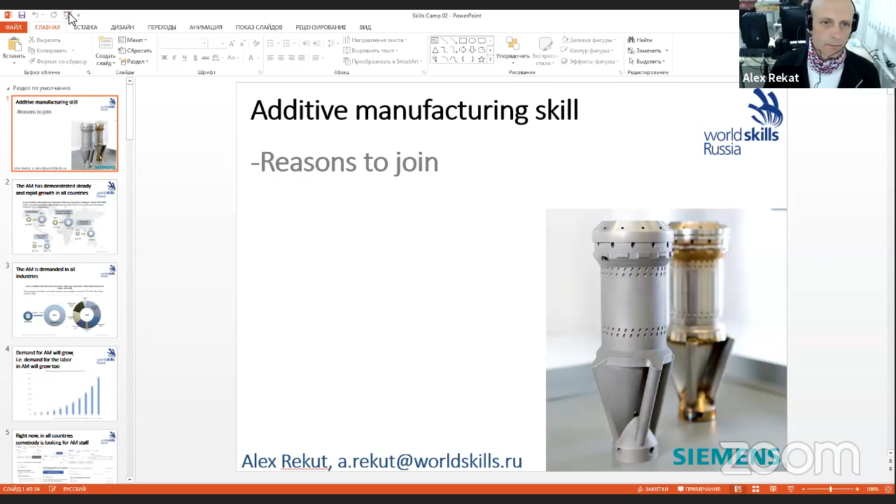First of all, let me introduce myself. My name is Alex Rekut.

In 2010, I proposed to create a new educational state standard for vocational education in additive manufacturing in Russia, and I proposed to create a new skill in [20]14. So from 2014 we have been developing this skill in Russia, and we have some experience.

I understand quite well that all of us are from different countries, and we have different situations in our countries, different conditions. That is why we have different views of additive manufacturing as a skill. But today I'll try to share part of our experience in developing this skill that could be, or maybe even definitely will be, useful for you in your countries and in your educational institutions.

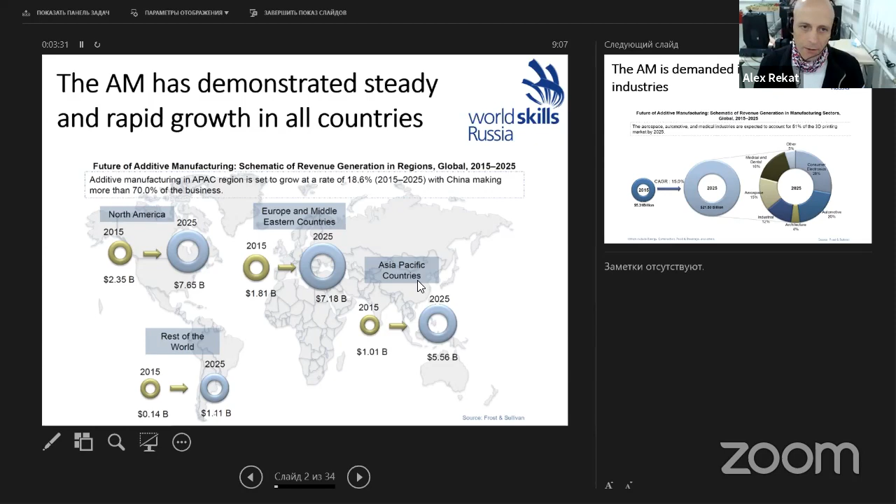But I believe that in your countries you have your own resources for staff seeking, and I think you will find that in your countries also there is some demand for additive manufacturing personnel.

Additive manufacturing is part of Industry 4.0 and one of the global employment trends, and that is very important for us, this word trend. I'll try to explain a little bit later why.

Also, additive manufacturing skill compliance with standards - I mean labor standards - and additive manufacturing is a global educational trend.

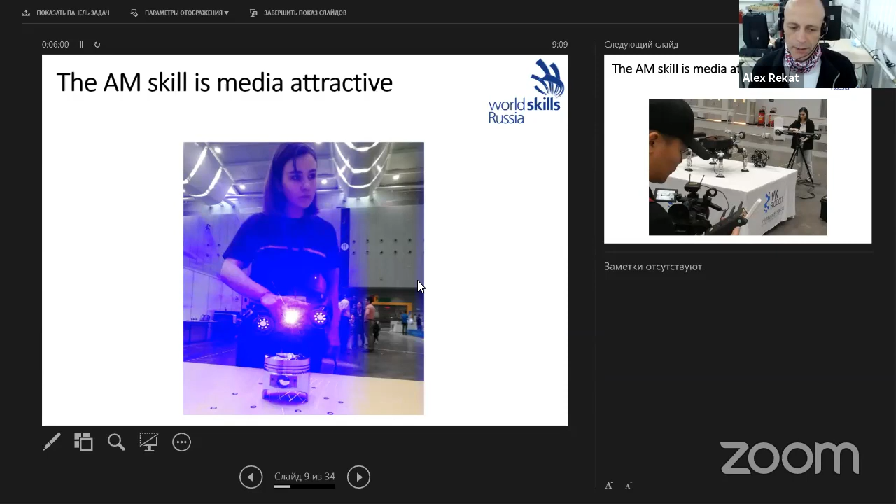From the very beginning, in 2014, we decided to develop our skill not only as a skill, but as an exhibition project too. That is why we attract media at all our championships.

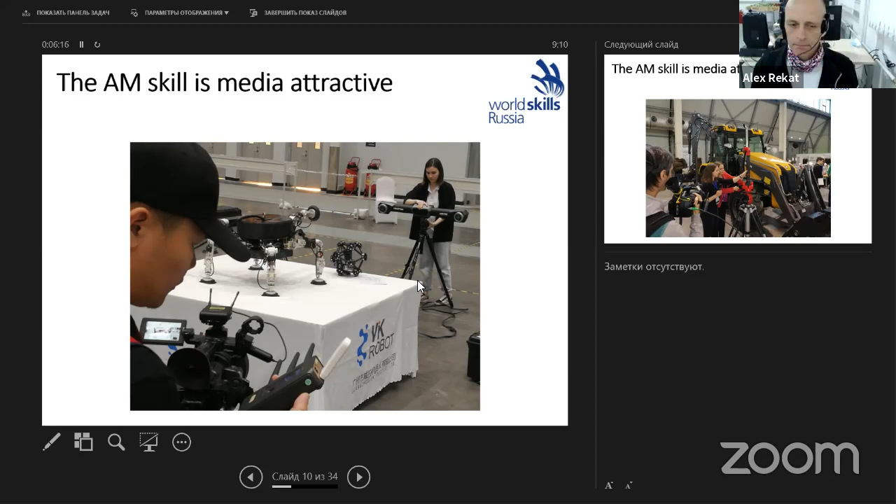We are all, or most of us, from educational institutions. Our goal in educational institutions is to give education, vocational or higher education, doesn't matter. In all skills, our goal is transfer of best educational practice and also education for young people. But we couldn't work without decision makers' support.

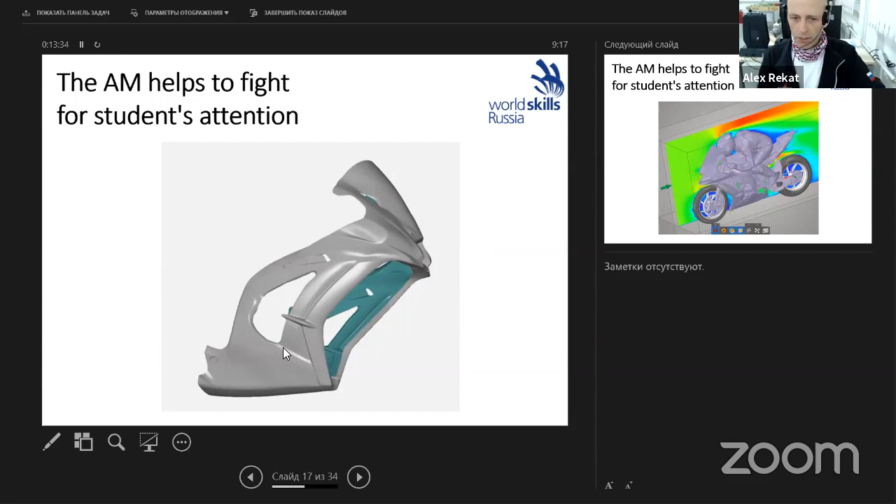So here are some pictures from the beginning. We have a real motorbike, and we made a 3D scan of it. Then we clean some parts or select some parts from the 3D scan, create a model, and test this model with CAE.

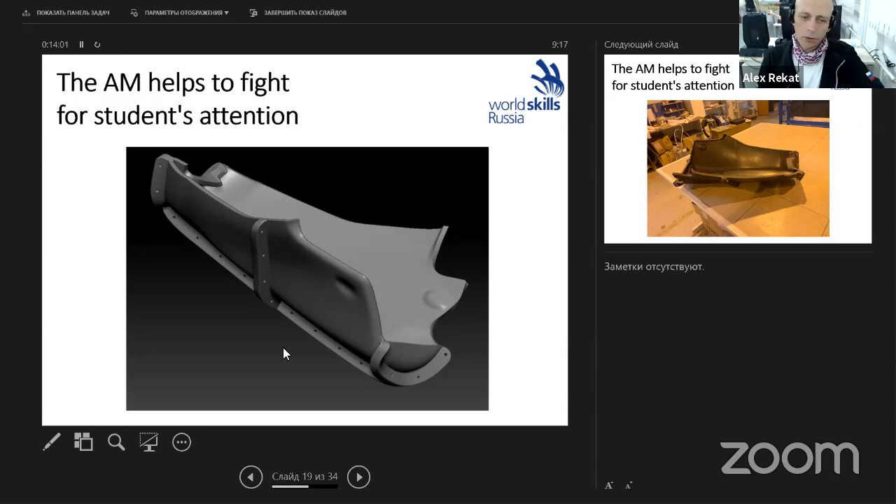Then we create a molding form, or sort of it. Here we have definitely a 3D model of this form, this matrix. Then we printed it with an FDM printer and created the real part.

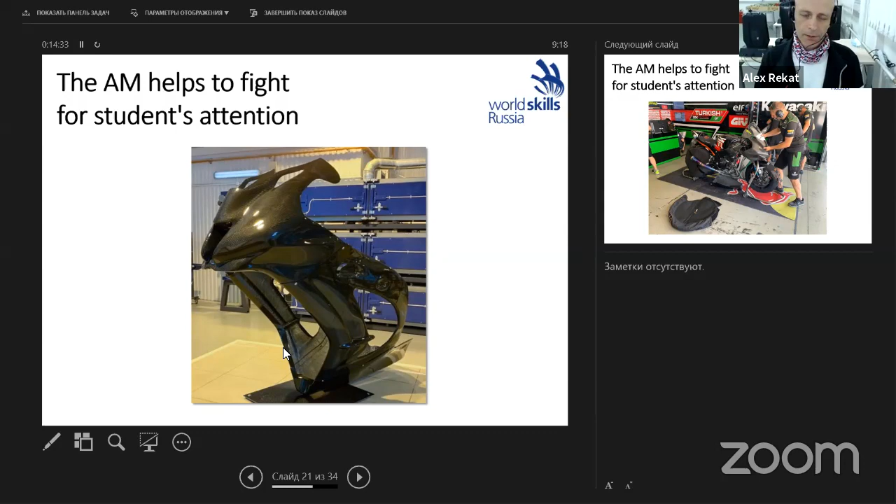It is very important for young people to do something cool that they think is cool. And motor racing is definitely cool in this system of valuable things, as I think. Well, after installation of this part, the result was Kawasaki won.

And third reason. Well, it's always quite difficult, you see, to choose one of two or three talented guys whom you trained during the year, from one side, and every one of us wants to win, wants victory for his contestant.

Additive manufacturing and CAD are a little bit similar, or even similar time to time. And for development of additive manufacturing, if you already develop CAD skill, you need only a few things. First of all, software, and definitely a reason to develop additive manufacturing.

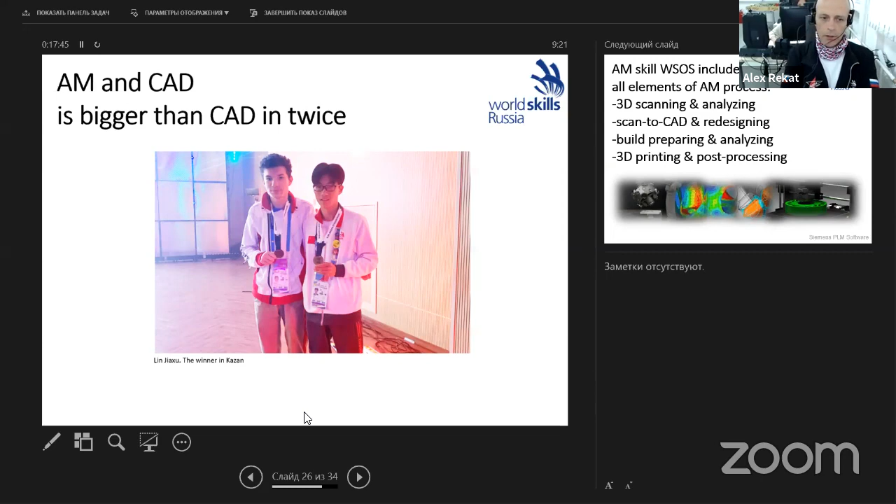That's what I say. So we have three main reasons. The first one, I think, from my point of view, is most important: it gives us new opportunity to develop our educational institutions, because it helps us influence decision makers and attract funding.

The second one is involving students in your projects. And the third one, maybe not very important, maybe not: it's a way to increase chances for winning, because usually we have everything for this skill in those institutions that provide CAD design.

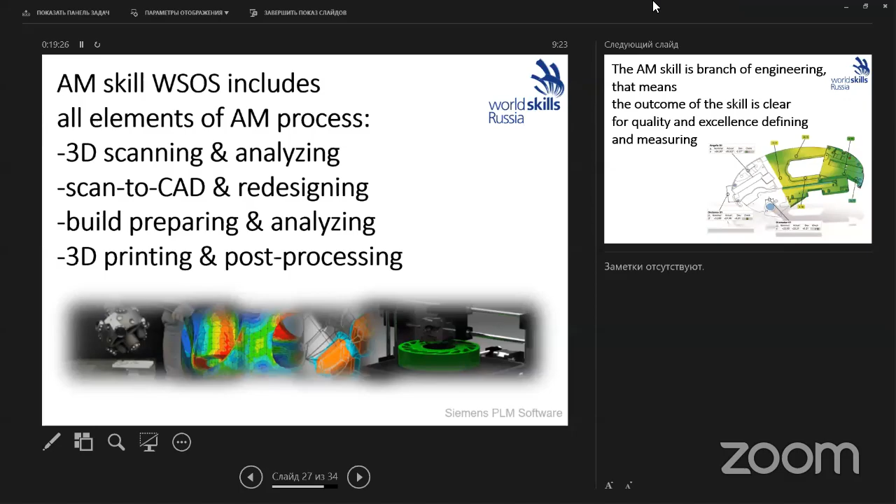And you see, I think I'll show you some other screen. Just a minute.

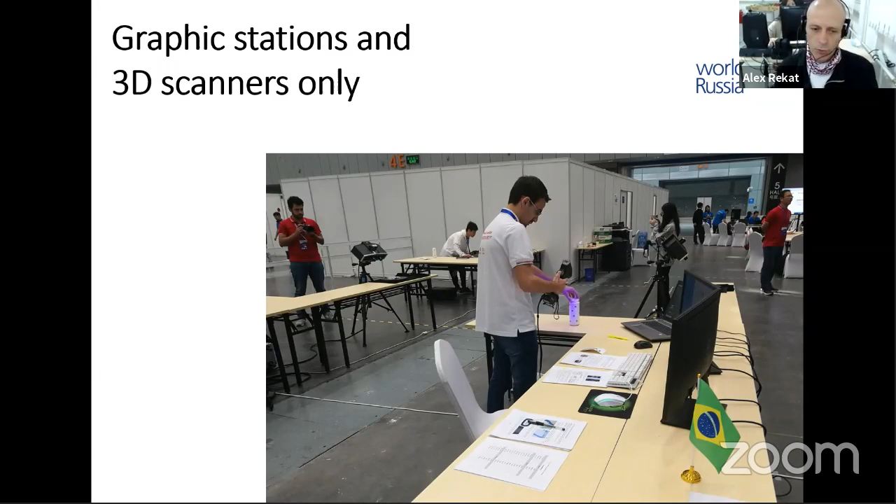Additive manufacturing skill doesn't require a lot of materials. Yes, it is also a difficult question because of 3D printers, because of additive machines. We need some materials for them, and we need to use some maybe expensive 3D printers, some additive machines in our sites during the competition. Yes, it could be quite expensive, but now here, during these days, I think we can find some decision that will be convenient, suitable, that will be appropriate for all institutions in all countries.

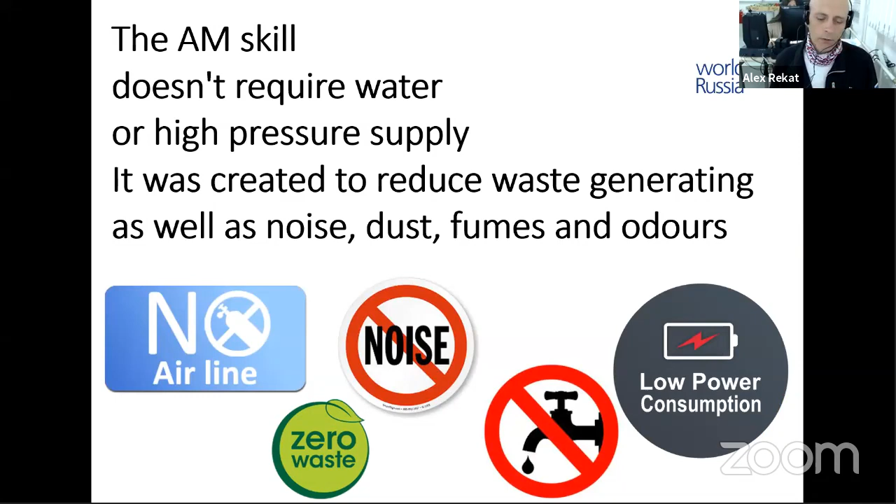Time to time, it is very important because of our WorldSkills regulations. We need to be environment friendly, and we are environment friendly. Our partners.

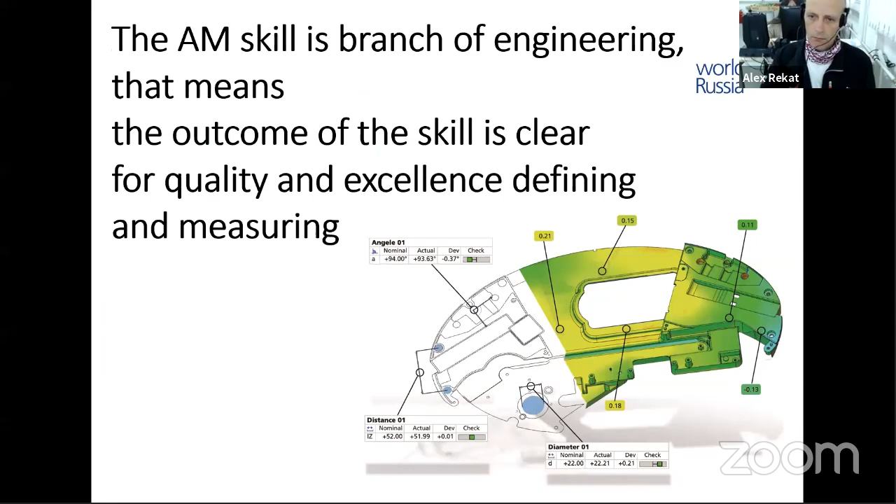Additive manufacturing skill in Russia, supported by global partners of WorldSkills International. First of all, this is SIEMENS. If you see, because we have quite a lot of elements in additive manufacturing skill, such as scan-to-CAD and redesigning, build preparing, and analyzing, and 3D printing and preparing for 3D printing, first of all for support creating, and all of these stages, we need some software.

And it would be better to have only one single application that could allow us to do all these things, to accomplish all parts that we need. Definitely, we couldn't use Siemens NX or Solid Edge for 3D scanning, but we could use Siemens NX for all other parts.

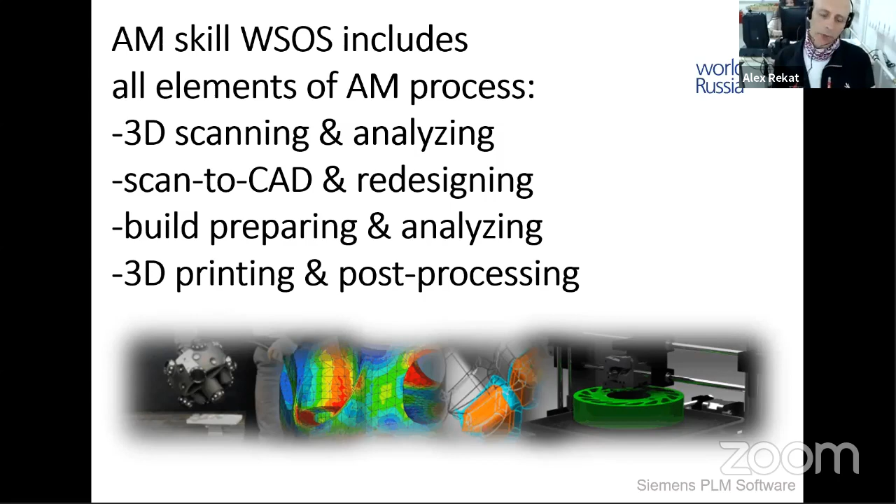In Russia, before this year, we usually used not only NX, but mostly Geomagic Design X by 3D Systems. And I asked 3D Systems about support, but they refused and told that WorldSkills is not interesting for them at all. We have, in WorldSkills International, a good partner, Siemens. I offered to support us to Siemens, and they accepted. They told us that they will give all that they could give, for example NX and special plugins for NX for additive manufacturing and CAE and preparing, so on and so forth. That is why Siemens NX.

Definitely Mitutoyo and DMG MORI. DMG MORI supports us in Russia, and DMG MORI supported us during the Kazan championship last year. But as I understand, it will be a serious question for some countries, or maybe for all of the countries that decided to join this skill, because DMG MORI is quite expensive, incredibly expensive for most educational institutions.

So we need to think together which technology or technologies, which material or materials we will use. It could be FDM printers with industrial plastics. It could be FDM printers with metal printing. I believe that most of you are aware of this technology, and this one way will be maybe most reasonable for us at that moment.

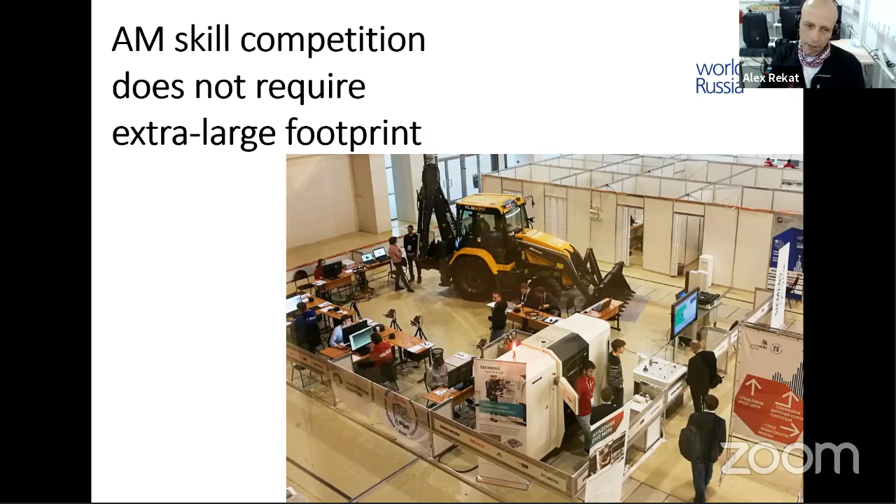Well, this is the last slide of exactly this presentation. During this presentation, I tried to explain the difference between additive manufacturing and other skills, and give you some view on how you can use it to get something useful for you personally and for your educational institutions.

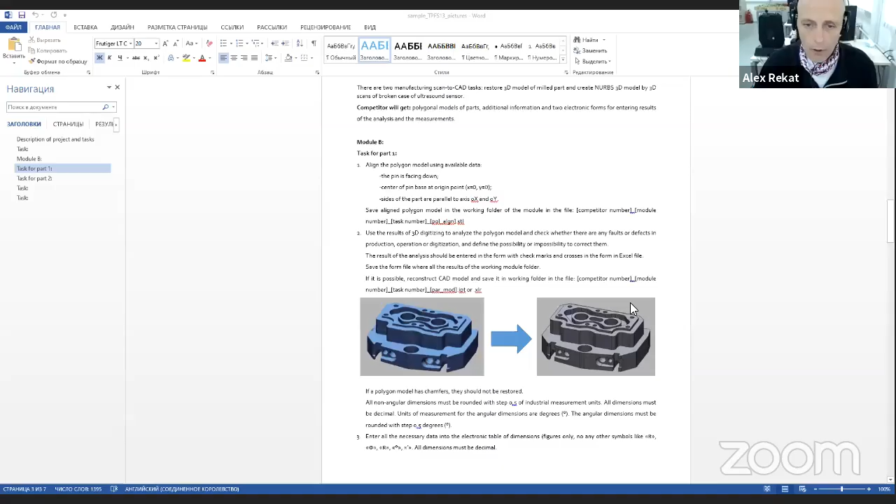I'd like to introduce you to a sample of the test project that we used in Kazan.

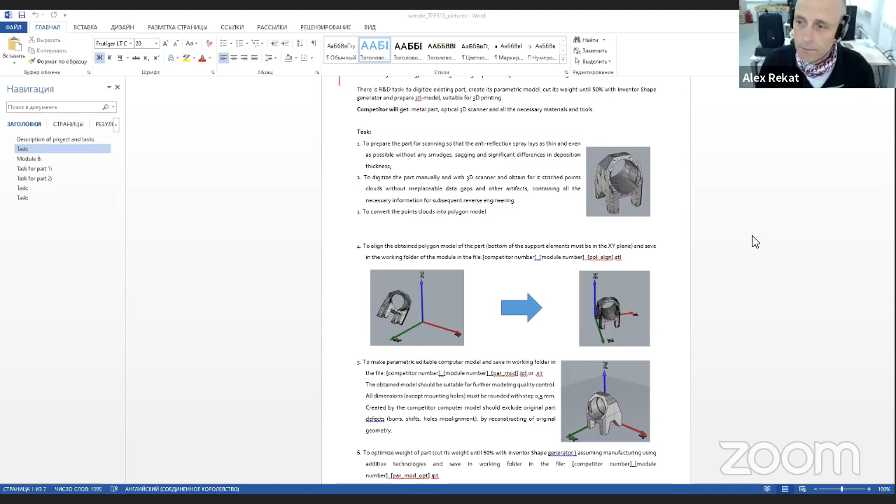And in fact, we have the first model here that we can connect with, the first model with 3D printing, completed using 3D printing.

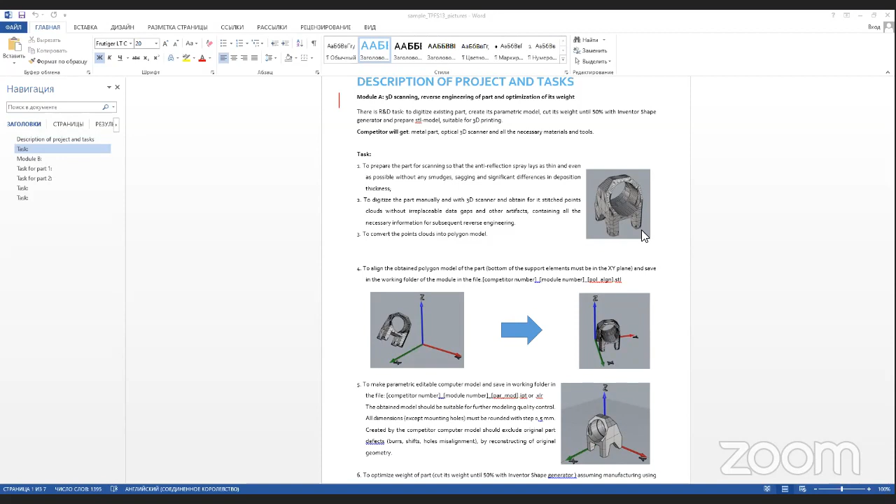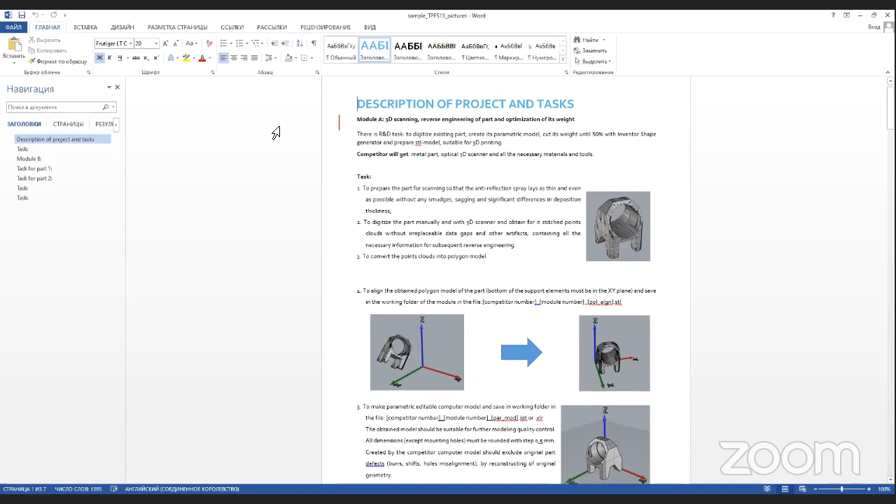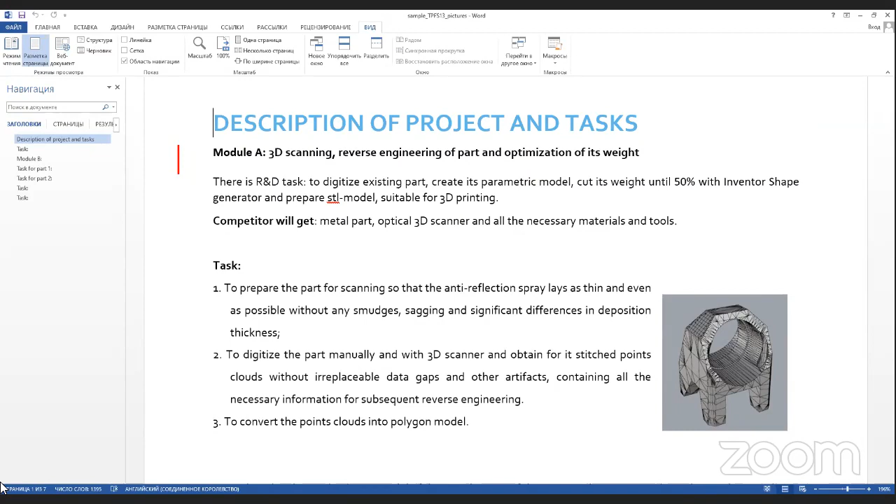Sorry to interrupt, Mr. Alexei, can you make the screen bigger? The text isn't easy to read. I think on the bottom you have zoom, you can zoom a bit bigger. Yes, could you close the window on the left side please? Thank you very much. Here it is, much better.

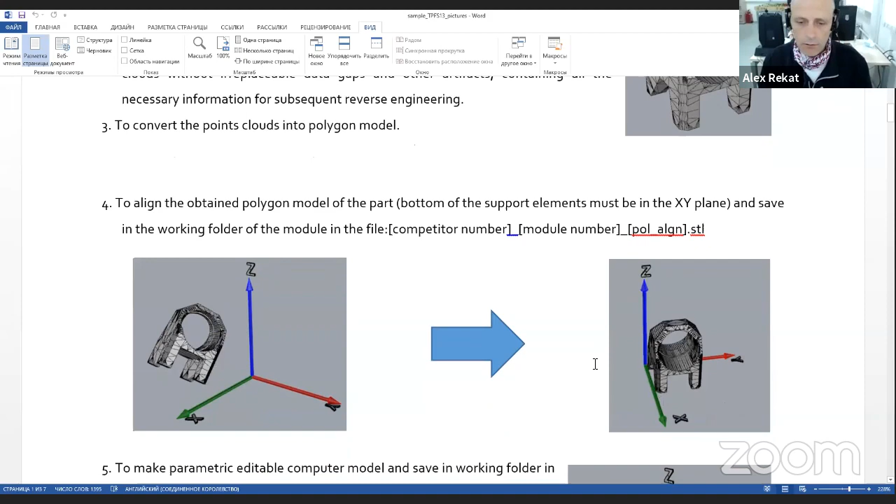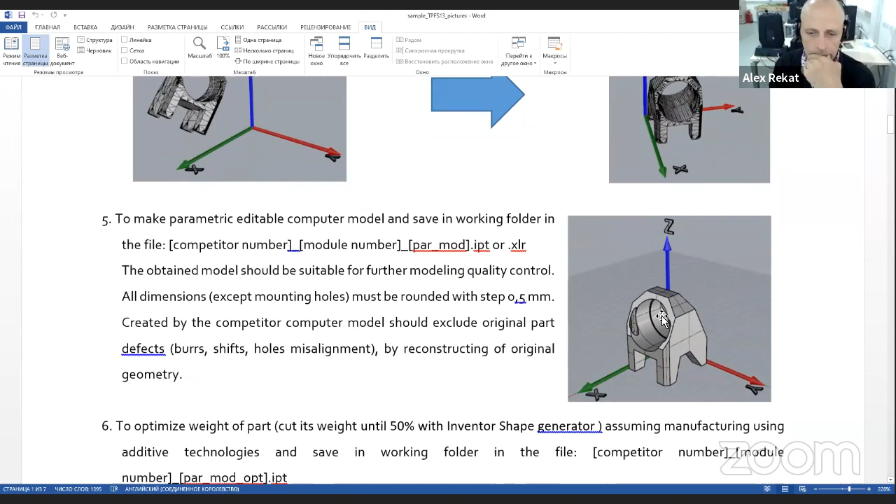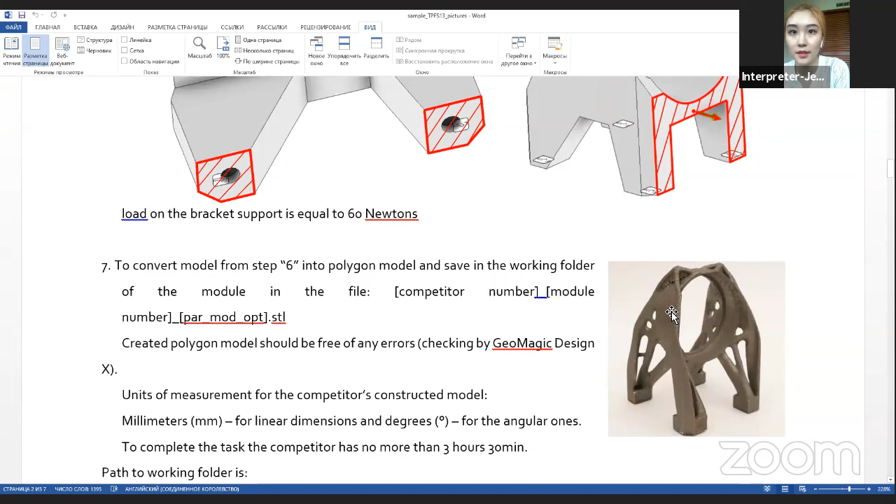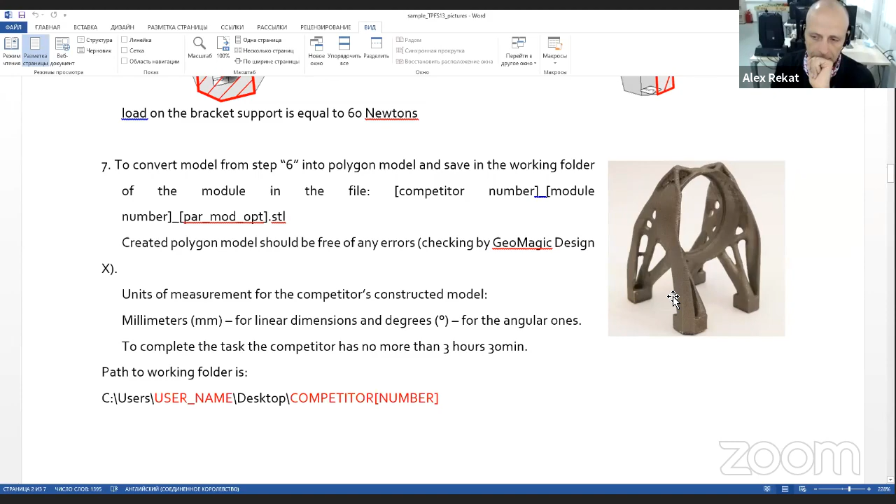And prepare the model for printing with DMG. The second task was reverse engineering of this part.

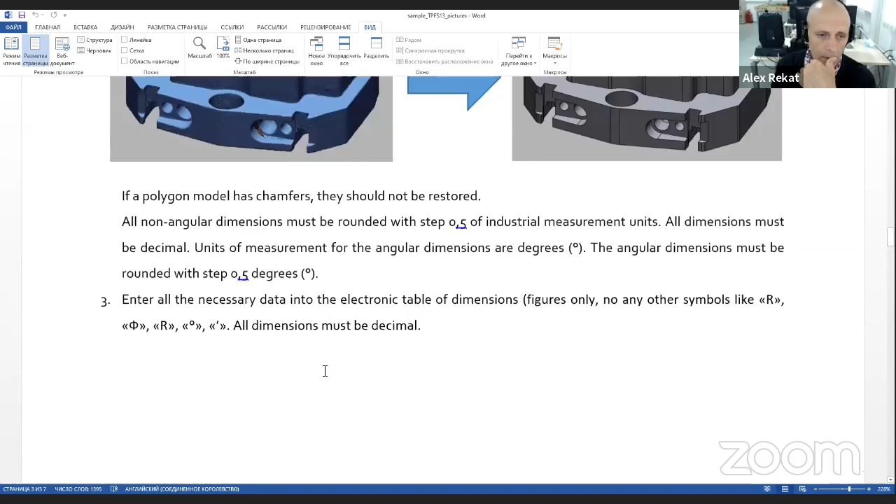You can see it has a lot of defects, and they needed to create a proper model. Just a minute, I'll show you the model a little bit better.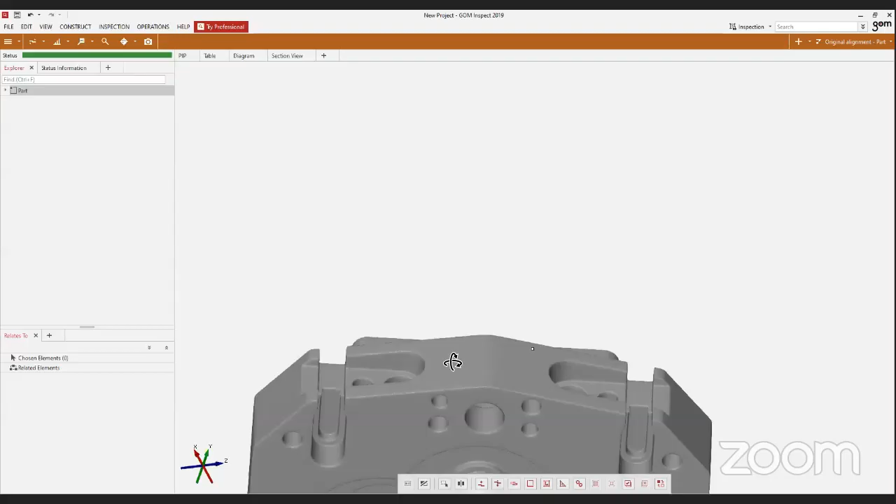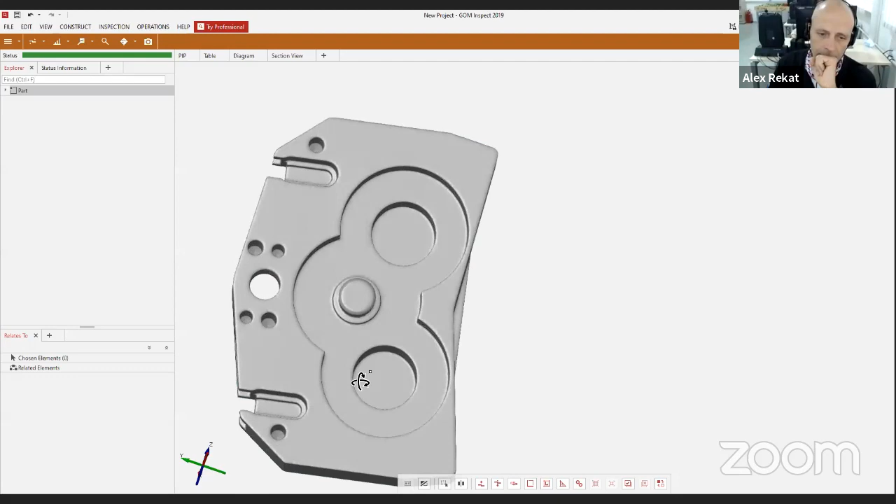They got a model like this. You can see here mistakes - I don't know if it was a mistake of 3D scanning or of milling, I think 3D scanning in this case. It has a lot of mistakes in these small elements, and they needed to find these mistakes, correct them, fix them, and get a proper model with nominal sizes.

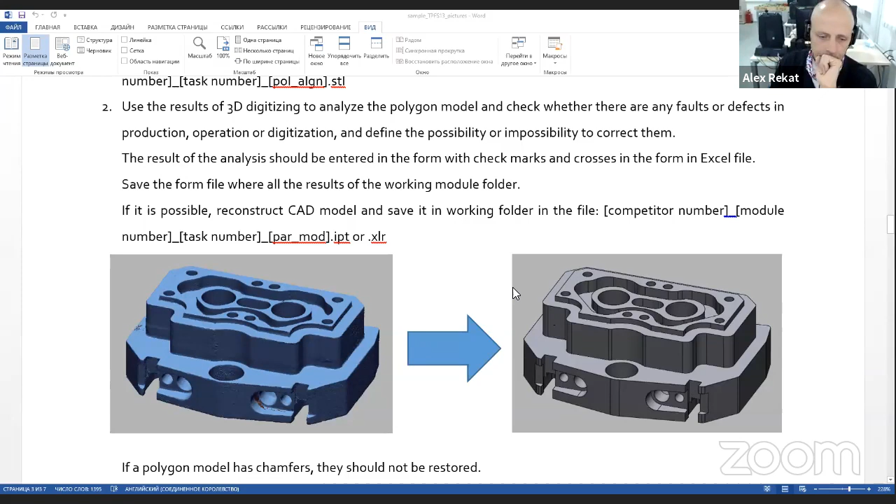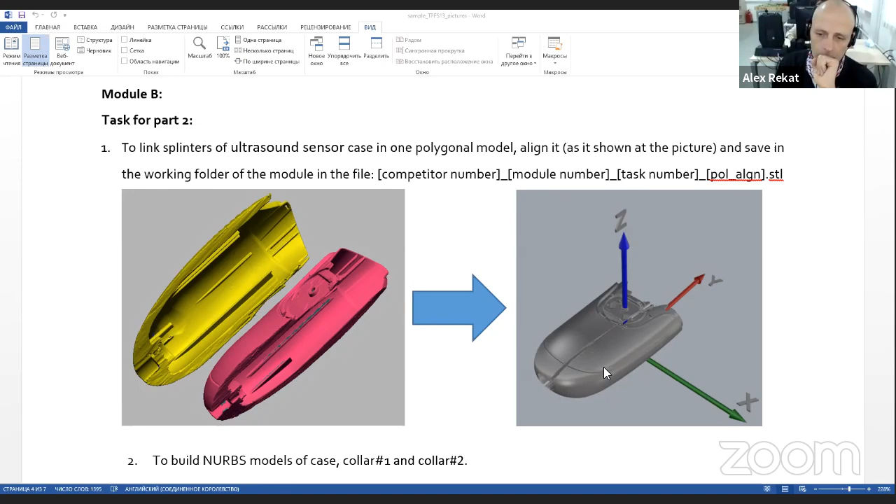Like this. This one, module about 3D printing again. The competitor got some broken part, or a 3D scan of a broken part, and some parts for alignment, and needed to recreate this part, rebuild it, and then prepare it for 3D printing.

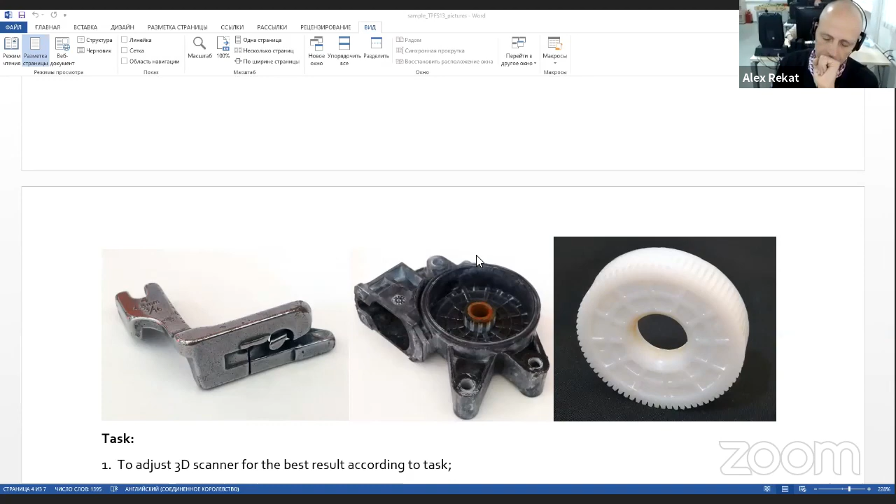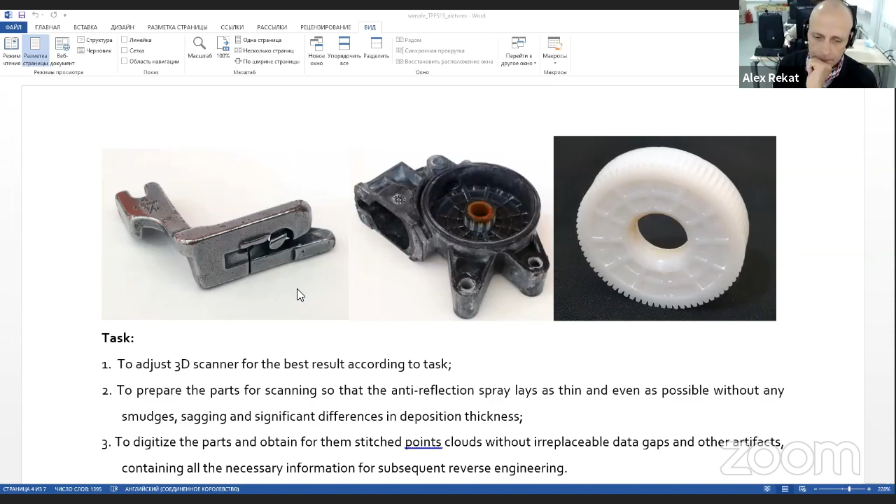And a 3D scanning module - we have some different parts with different surface conditions: semi-transparent, with complicated geometry, and glossy. We need to get some result of scanning, and we assessed the quality of the 3D scanning.

And the last one, a sort of metrology task. I told you about expensive equipment that we use from time to time in our sites and tasks - this is one of them. We had an airplane in Kazan, a small one, and they didn't know it would be an airplane.

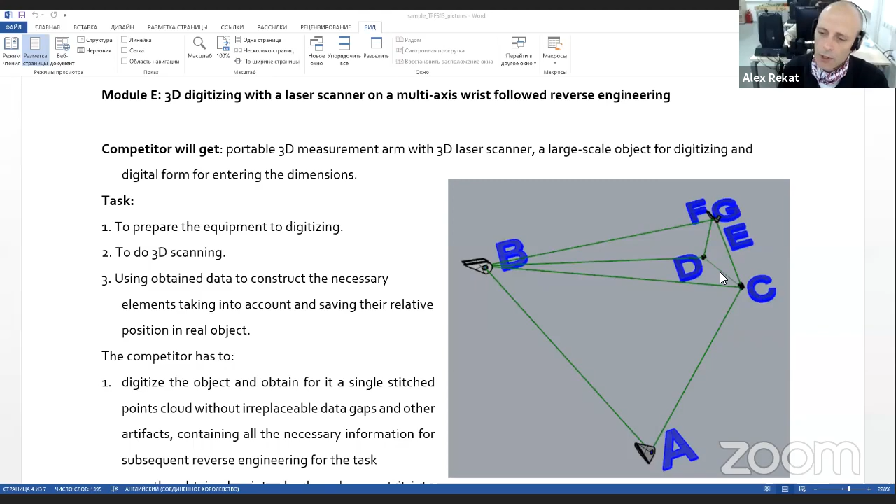We gave them a laser scanner with an arm, 6 or 7 axis, and none of them had used such equipment before. We gave them some time to learn how to use it, and they needed to use this equipment for measuring and finding important dimensions according to the task. Here you can see some brackets of wings from the airplane, and they needed to find these measurements.

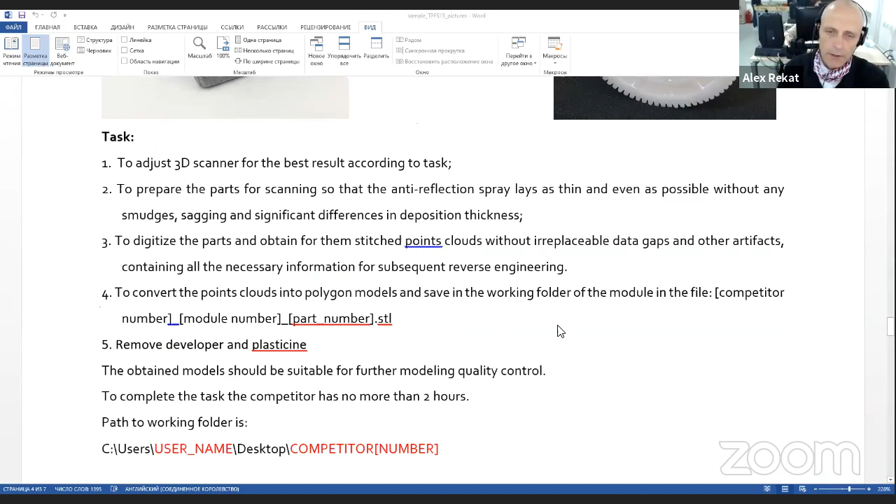But I ask you to remember that it is only a sample.

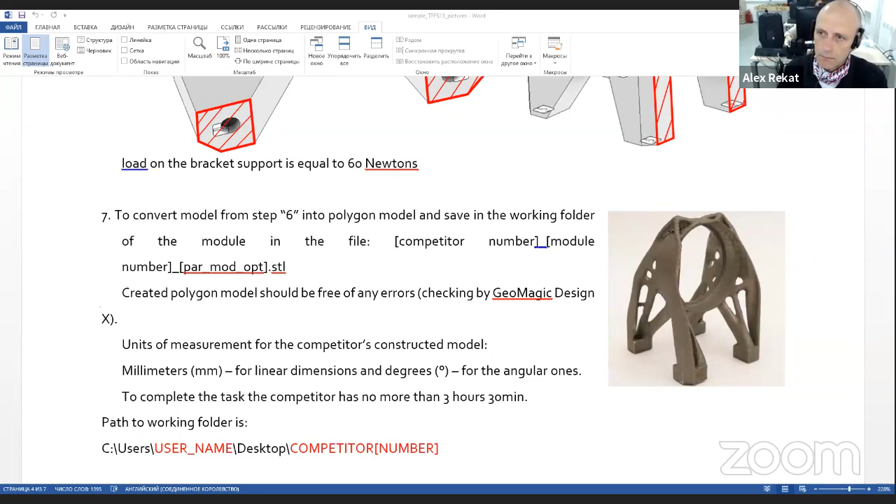During this training, we need to discuss and decide what we think is important and what we will include in the task for Shanghai. If you have some questions, please ask them by chat or personally to me by Telegram.

Do you have any questions, colleagues? Well,

Concerning our plans for next 2 days, tomorrow and after that, on the third day, we are going to provide a sort of course. We will show you real tasks from our experience.

Manas? Hello? Yes, yes, yes. Actually, can we get this task, or where it will be available, this task that you have shown? So can we refer or see that, or PDF, or where it will be available? Sorry? So we want to review the task in PDF or material, so that we can have a PDF file with the task.

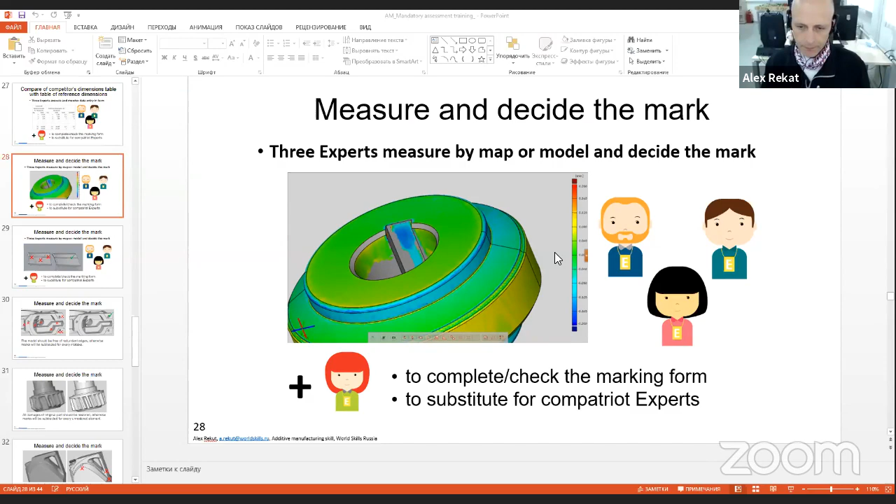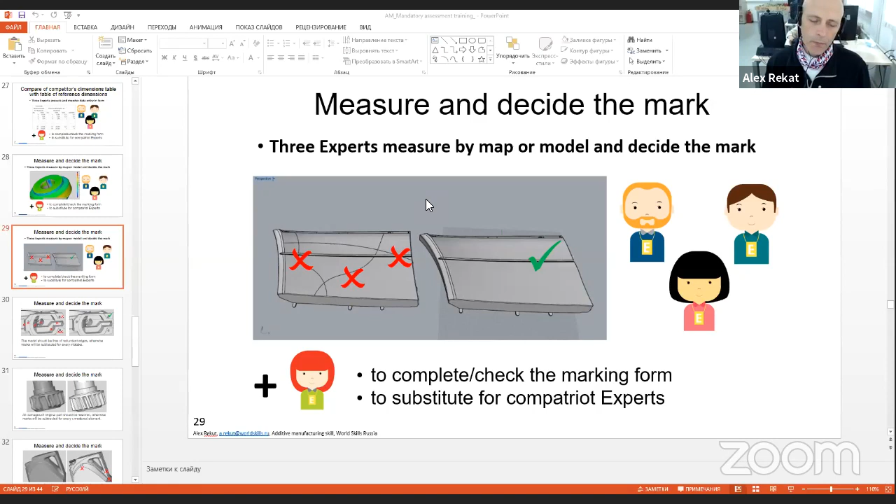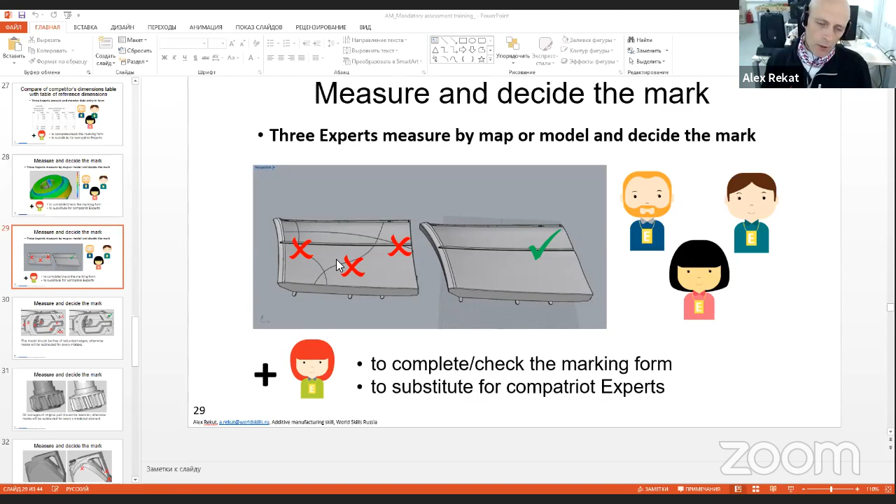Concerning proper models, everything is quite simple. A model should be free of mistakes and extra edges. So you can see a wrong one and a proper one.

The same situation. You can see two models, 1 and 2. On the left side we have a very similar one. And if we convert this one and this one into an STL file, time to time we can get a very similar or equal result.

But here you can see quite a lot of extra edges, redundant edges - here, here, here. Usually in Russia we thought it was a mistake, because we thought not only about additive manufacturing, but about digital direct manufacturing too, meaning for example CNC milling with a CNC machine. And in this case all these edges become a serious problem.

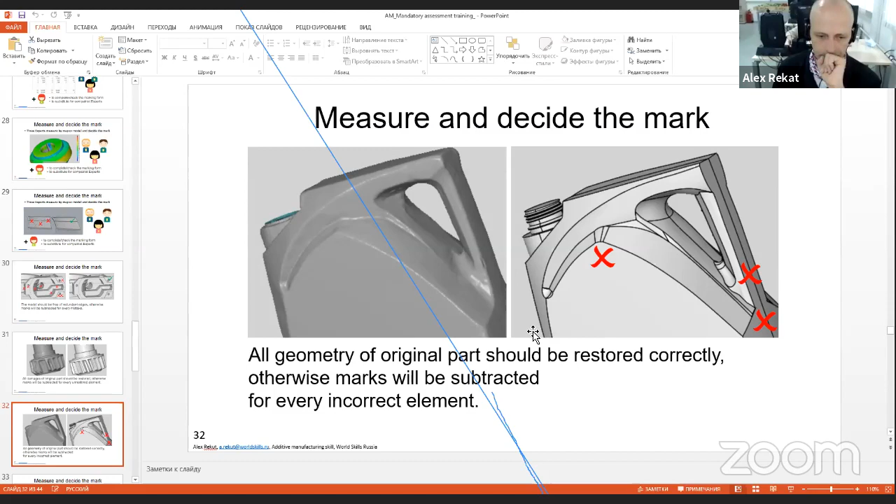And it is not very easy to be honest enough from one side, and from the other side, it is not very easy to find all mistakes for all competitors. You can compare this one and this one.

Scanning is also not a very simple situation, because in scanning we could have a lot of mistakes too. For example, like this - we have duplication, stitching, registration issues here, and here we have three of these mistakes in the model.

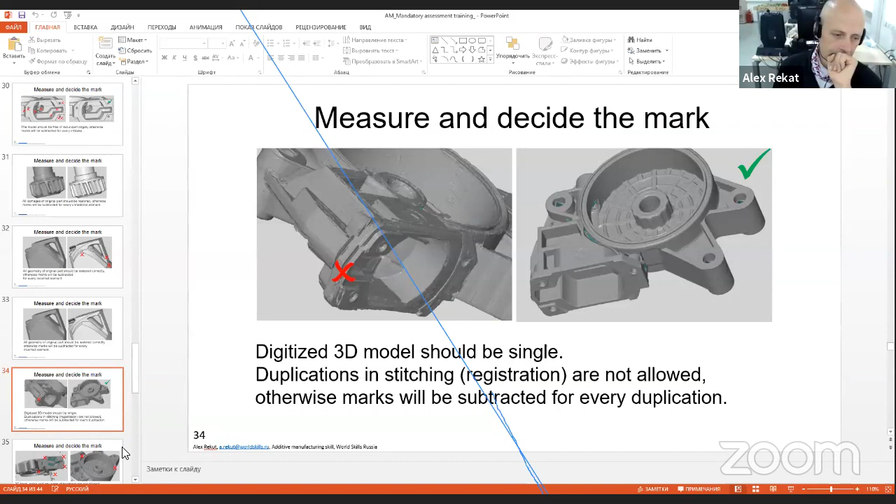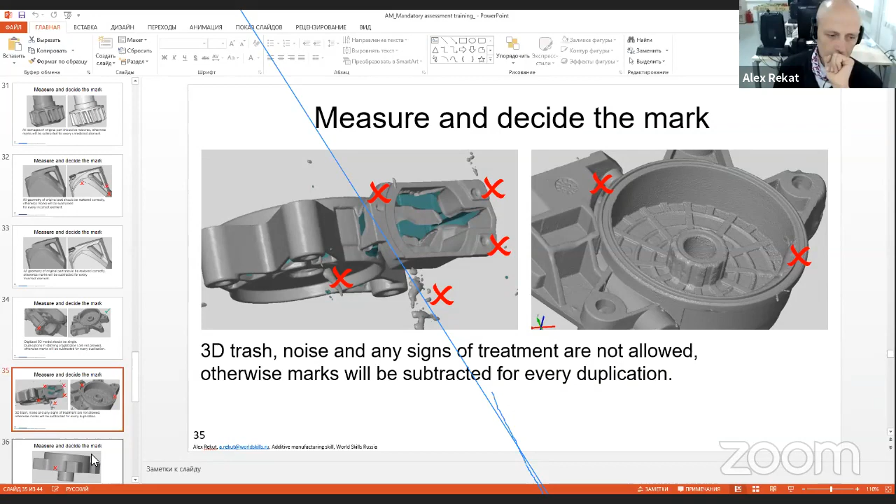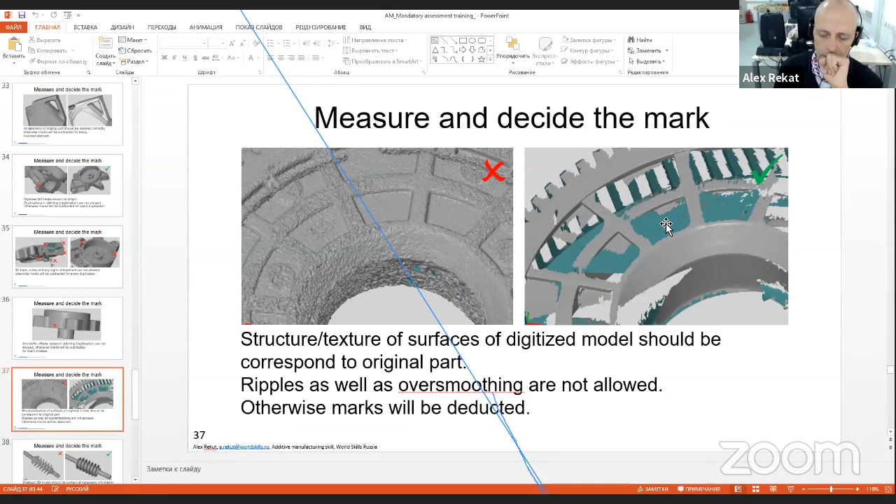The structure and texture of surfaces of the digitized model should correspond with the original part. That means this is wrong and this is proper. Even with a lot of missed data, we can use this one for the scan-to-CAD process, but this one we cannot, sorry.

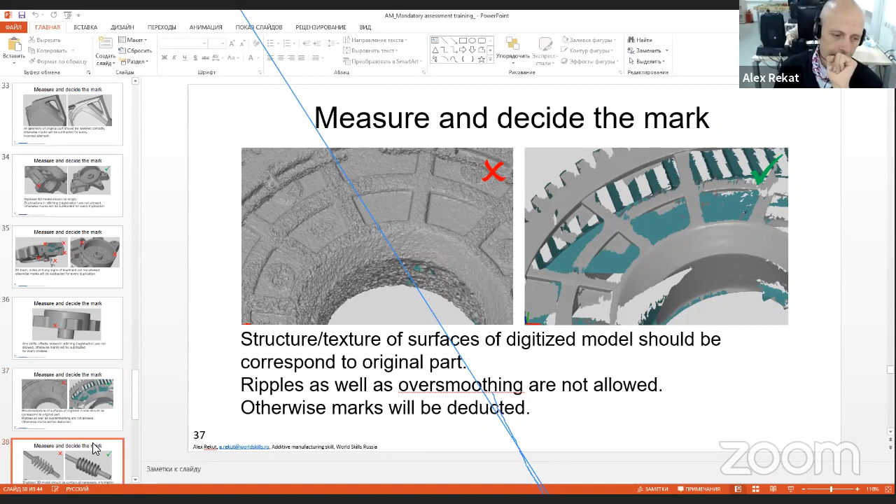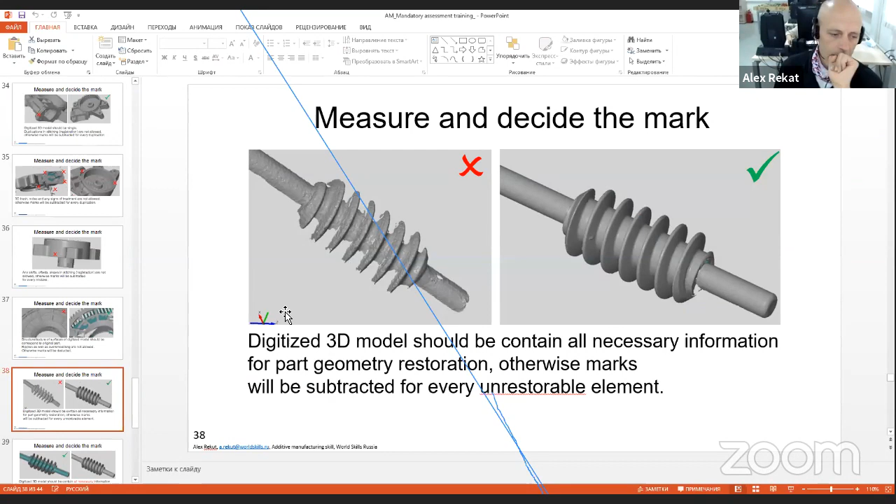We're in the same situation with surface and with the mistake of registration. And then we need to check if the digitized model contains all necessary information, because we need to use this model not for direct 3D printing, for additive manufacturing - we need it for the scan-to-CAD process, and only after that do we need to print it.

We can use models with some missing data, but this missing data could still allow us to rebuild, to restore all information.

Now I propose to return to this stage, and we will try to show you our new approach to assessment, for automatization of assessment.

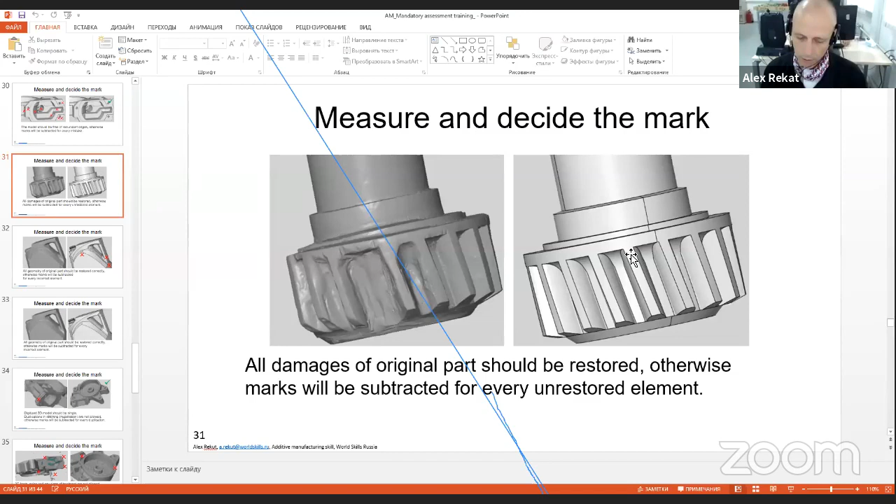I ask my colleague, our competitor from Kazan, Nikita, to show a sample of the new approach to assessment. We will use GOM Inspect. I believe that those of you who use GOM ATOS scanners know this application.

I don't know if we will use GOM ATOS for Shanghai, but we have quite similar functions in Siemens NX. So if Siemens decided that we couldn't use GOM ATOS, GOM Inspect, we will use Siemens and similar functions from Siemens NX. Please, Nikita.

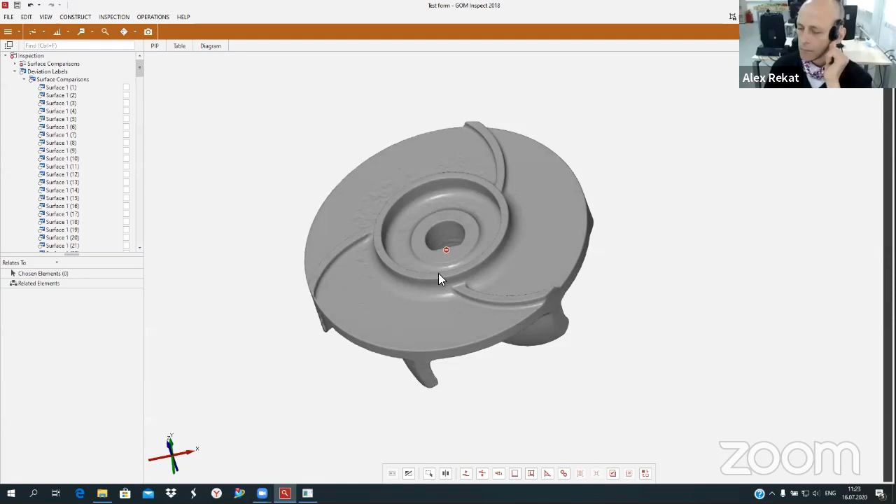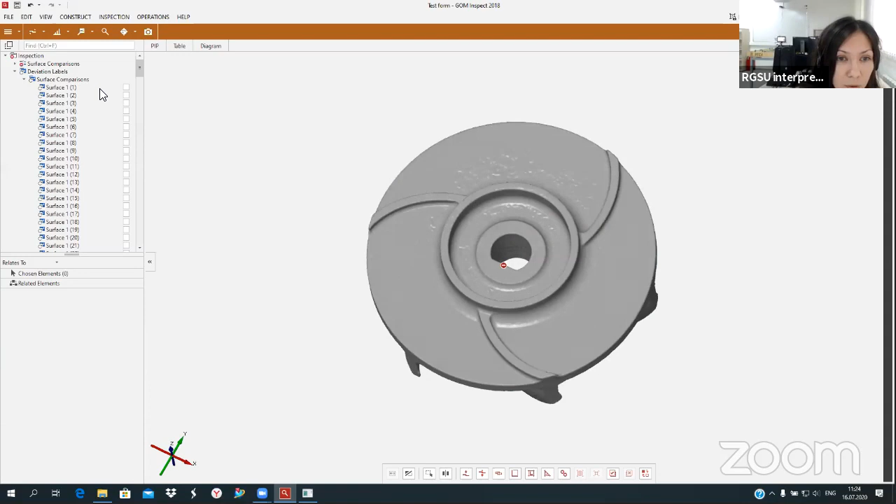Dear colleagues, can you hear me? Thank you. So we will demonstrate to you the process of automatization of the assessment. We have a file with a prepared STL model that was given to our competitors for them to make this model.

On this STL model, there are control points. Certain points define certain surfaces that will be assessed in future.

Each point shows the deviation of the competitor's work from the original model. In this case, the model is not loaded, so nothing is displayed. Every deviation mark shows the deviation of the competitor's results, but right now this model is not loaded yet.

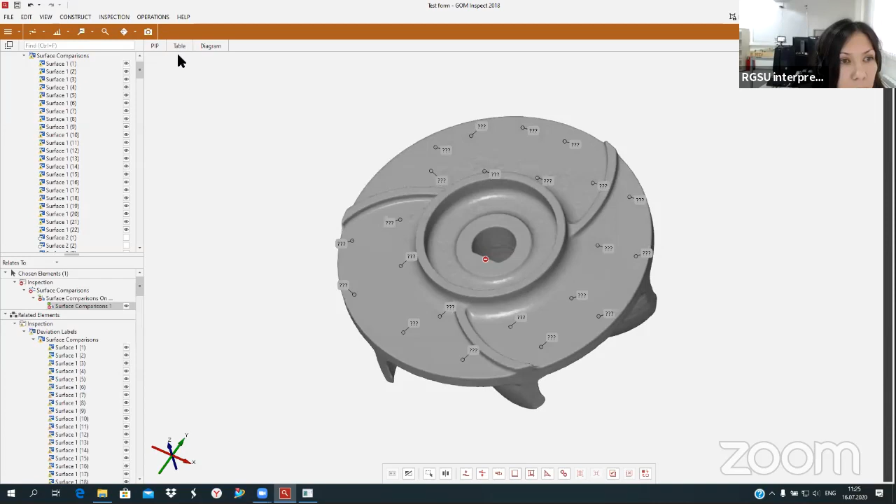All the control points are grouped in a table. You can see this table here. And in this table, in the last column, there are deviations. But now deviations are not shown because there is no competitor's model.

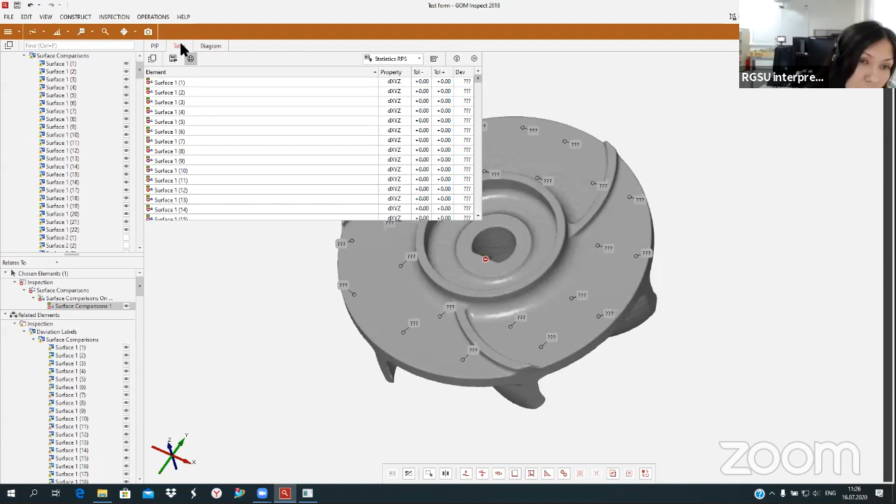So let's load the competitor's task project. This job is loaded in the STP format. And now we can see the model that was built by a certain competitor.

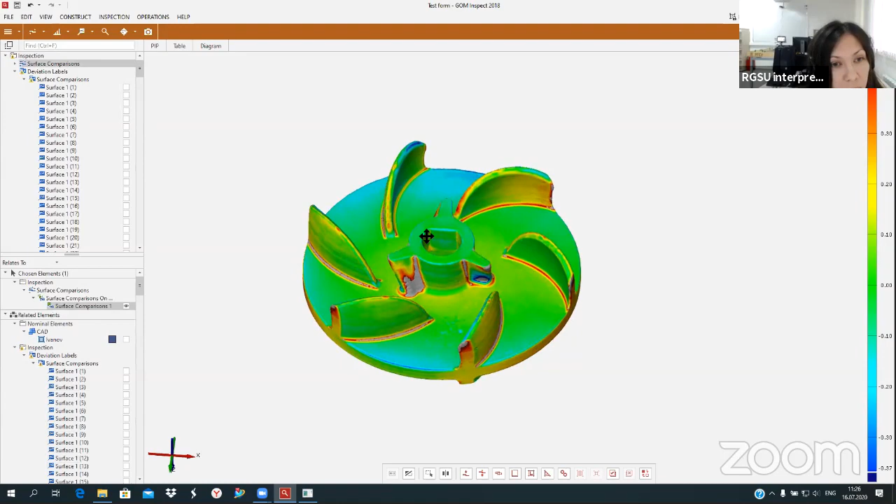And the matching of the competitor's model and the original model. Now we can see that the deviation marks are colored according to the part, showing the real deviation of the built model from the original STL model. The deviation marks or control points are colored with colors that show the deviation between the original model and the competitor's model.

All these changes are reflected in the table, shown in the last column, the deviation column. Here, all the values are shown.

And all these changes have occurred for all points, for all deviation marks, and we can demonstrate this.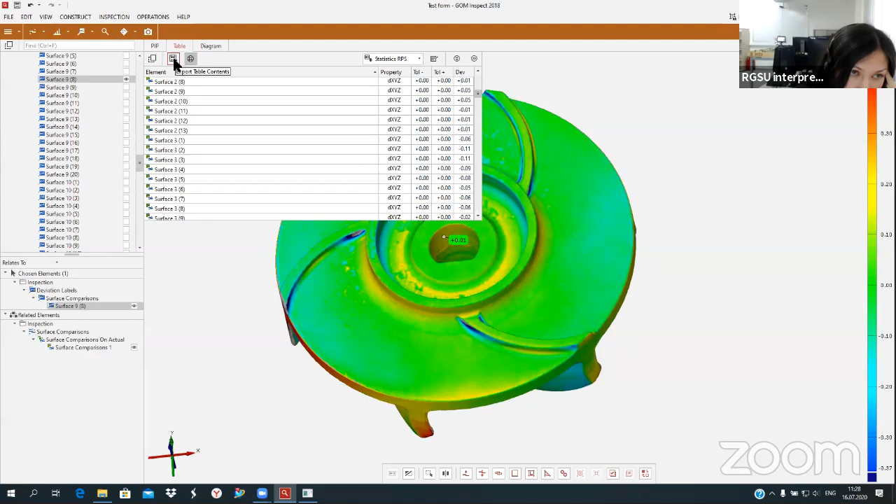After this stage, the work of the participant, that is, after this step, the table with deviations is exported to a separate folder.

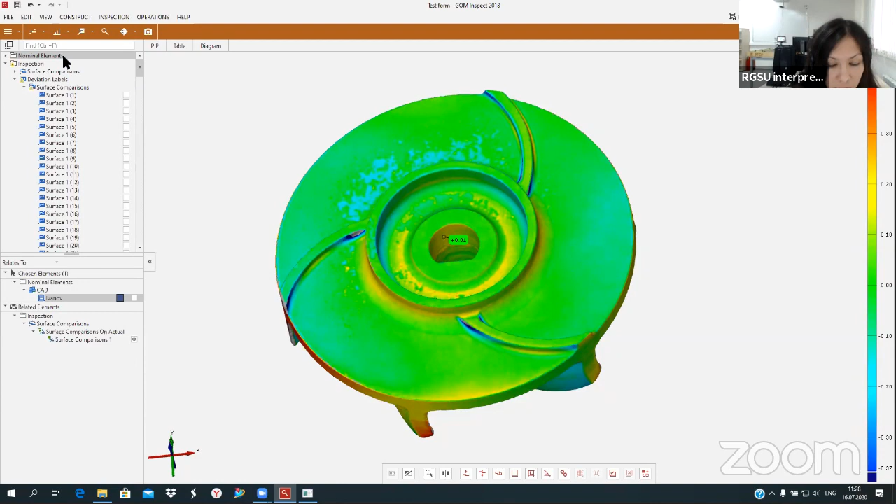After this, the loaded participant's model is deleted from the checking project.

And the process repeats with the work of the next participant, starting from the beginning with the project from another competitor's model.

In the same way, control points appear in the same places, but now with deviations for the specific work of the next participant. And the process repeats again and again for the next new competitor.

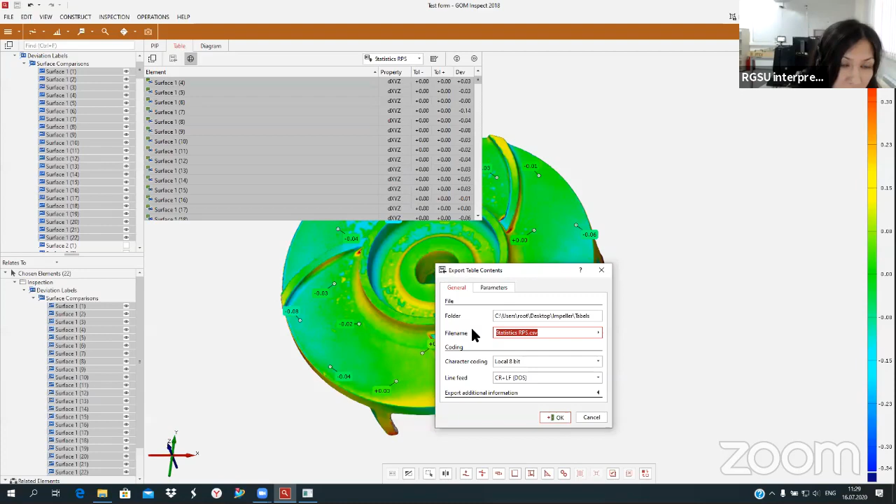After all the participants' tables are obtained, we run a specialized assessment module that includes just a few parameters.

The first parameter is the tolerance that the participants should have fit their model to.

And the percentage of control points that should be within tolerance for the corresponding surface, and the percentage of deviation marks or control points that should be in this range.

Good. After this, the folder with all the participants' tables is specified. We load the folder with all the tables from all the competitors and press test.

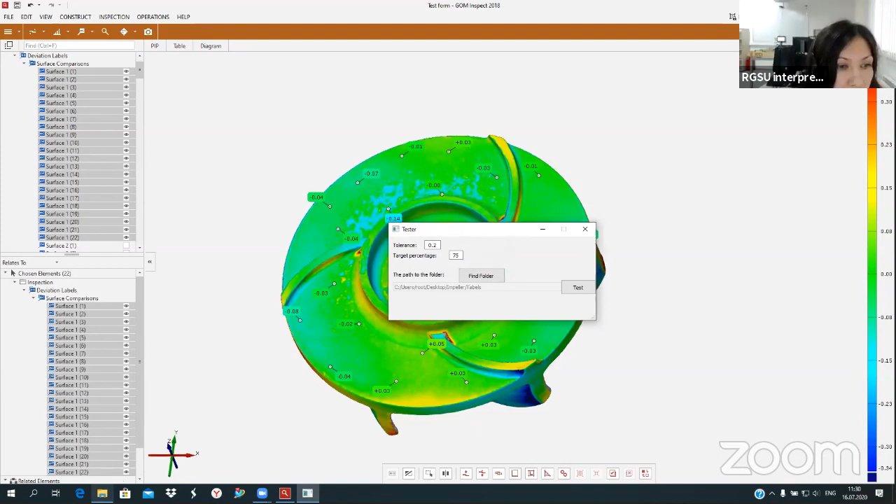It creates new ones. In this case, a folder called Result was created. The program creates a new folder called results, and there are all the tables of all the competitors.

It creates a new file with a detailed table for each participant, with detailed statistics for every surface and for every point.

We can see here all these points and for all the surfaces and the values of deviation, and the percentage of labels that are in the range.

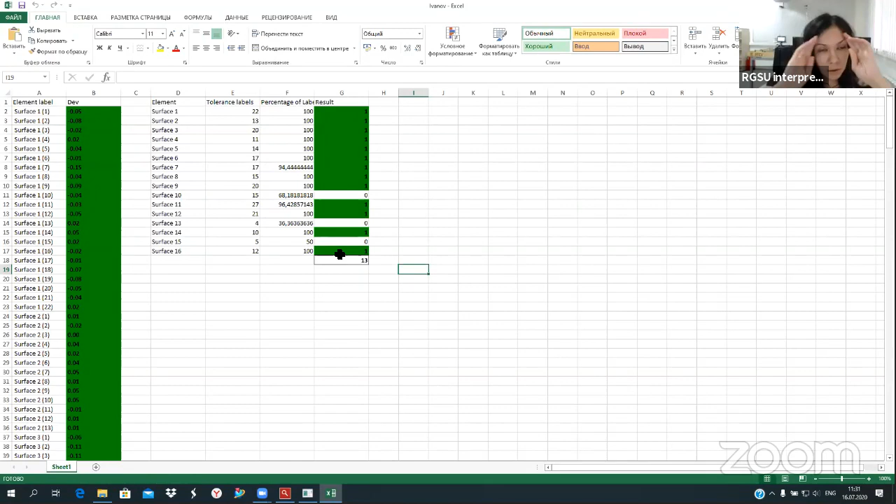And the result. In addition to this, a summary file is generated for all participants, with all results for all the competitors.

The results from this table are loaded into CIS. And now the assessment is ended.

Do you have any questions? Yes, I am Siva Kodali from Singapore. I want to ask about this assessment. I'm just wondering, the software looks very impressive, the comparison and everything, but I see that the measurement points you are comparing are based on the STL file, right?

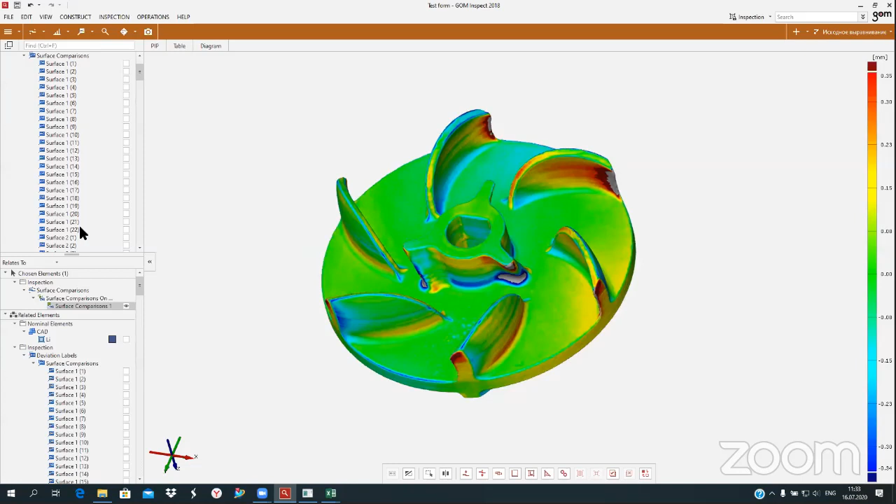Original control points are on the STL file. Is there any particular reason why we cannot use a CAD file?

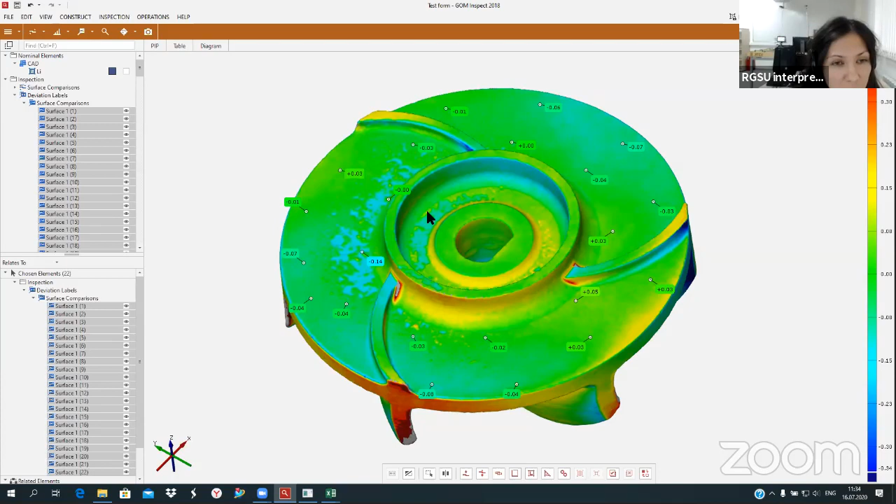Sorry, I couldn't catch your idea clearly. I'm afraid. So the STL file, how accurate a representation is it of the original, the actual part? Because I see that the STL file with all those control points is, in metrology terms, like a master. So how can this master with the control points be an accurate representation of the actual metal or plastic part? How is the comparison done?

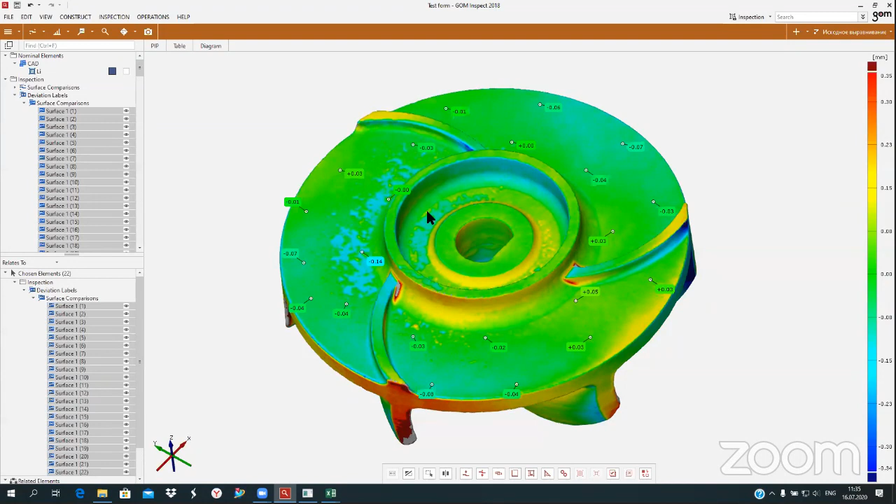Yes, definitely this is a problem, and this problem should be solved by the developer of the test project. This organization, or person, or group of persons should check everything and decide which one is okay or which one is not. They need to check if they can use this STL, or another STL, or not STL at all, and choose exact certain points that refer proper data to us during the assessment. But yes, we are just testing this system now, and at the next national championship it will be the first time we use it. So I think it has not only this one problem - I think we will find more problems besides this, but we need to develop it. And thank you for your question.

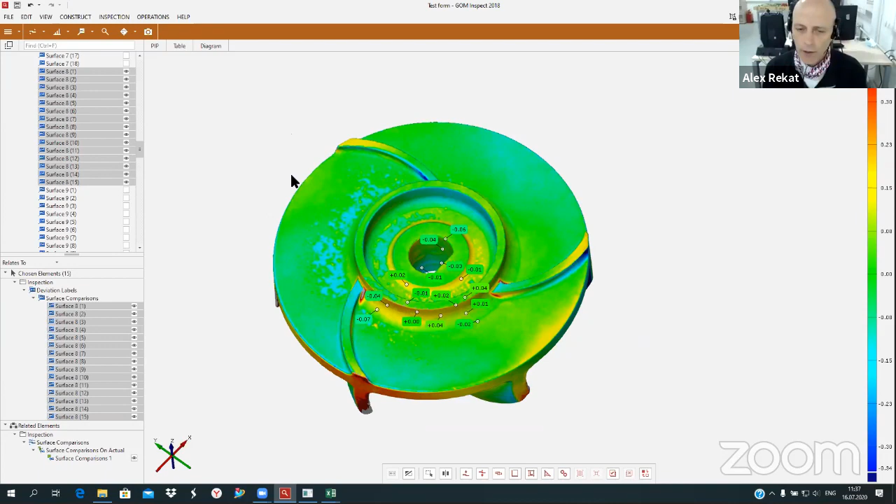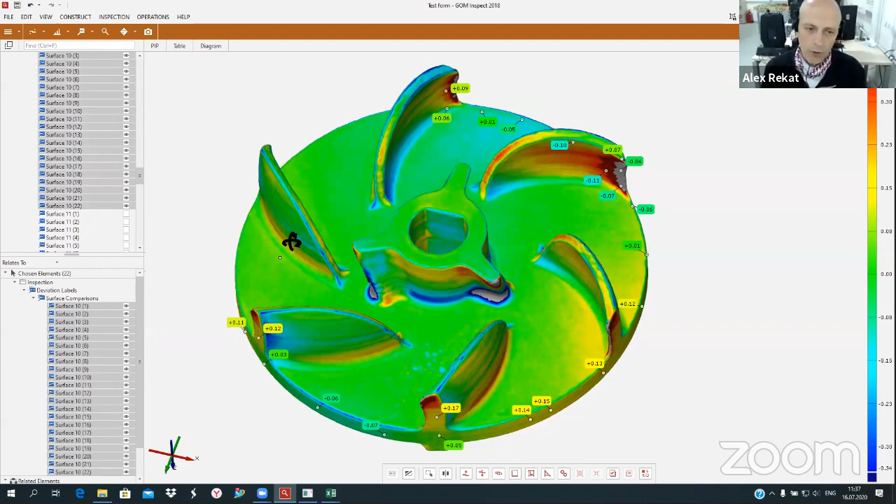Maybe not now, maybe you will find more questions about this method - maybe not today, maybe tomorrow. So please give us feedback about this situation, or your proposals on how we can improve it. That is why we're all here, not only me and Nikita and the Moscow team, but all of us experts interested in the development of additive manufacturing.

Okay, thank you, thank you.

Well, dear colleagues, that was the final presentation of this day. I hope you found something new and interesting. And I really hope that we will get some feedback from you.

So we are here for your feedback too. Please let us know what you think about the development of our skill, about the exact skills in it, about the content of our skill and possible content of tasks. I understand you have your own experience in some parts of additive manufacturing, or in all the parts we talked about today. So it will be very interesting and useful for all of us to collect your replies, your feedback, to sum up our skills camp.